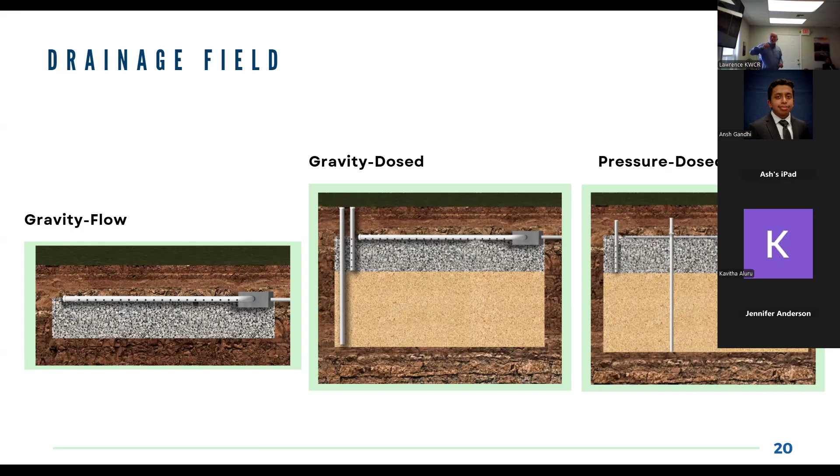Now they have to test, and they have to have at least a 4-foot separation between the bottom of the drainage gravel where the water is trickling down before it enters the water table. That's called the zone of treatment before it enters the zone of disposal. Many older basic systems were gravity flow, where the water from the tank just flows out by gravity. Often we'll have a pump involved where it could be gravity dosed, and sometimes pressure dosed, where a pump is pushing the water out. It's almost an underground sprinkler system that's spraying down into the gravel.

When we have a pump involved and it's a sprinkler type system, a pressure dose system, the drain field can be reduced by 1/3 because it's that much more efficient. Instead of this big area, we're reducing it by 1/3. And if you look at how costly it is, reducing it by 1/3 is saving money. So often people will go with pressure dose systems.

Is that a special sand? No, it's really not. It has to be a certain size, but it's your basic playground sand, the same stuff you have in the kids' sandbox. The sand that was used in the 80s and 90s was approved by the state at that point, but the sand used today is different than that sand. So there's two different types of sand. I wouldn't say so. It's still approved because sand can be very messed up and have all kinds of contaminants. It has to be clean, certainly. Different type of sand. Confirm that with me, please.

I'm just curious when you say different type of sand, because the state approves the quarries that we get it from, but it's the same basic sand that we use for concrete work or for child playgrounds. If you confirm that for me, I appreciate it. I don't know what exactly you're asking me to confirm? Two different types of sand have a different, maybe, long-term absorption rate. Well, that's exactly true. Some are acceptable and some are not. They give us a standard range, and the sand always has to be tested, an engineer tested to show that the sand we're using fits that range as approved by the state.

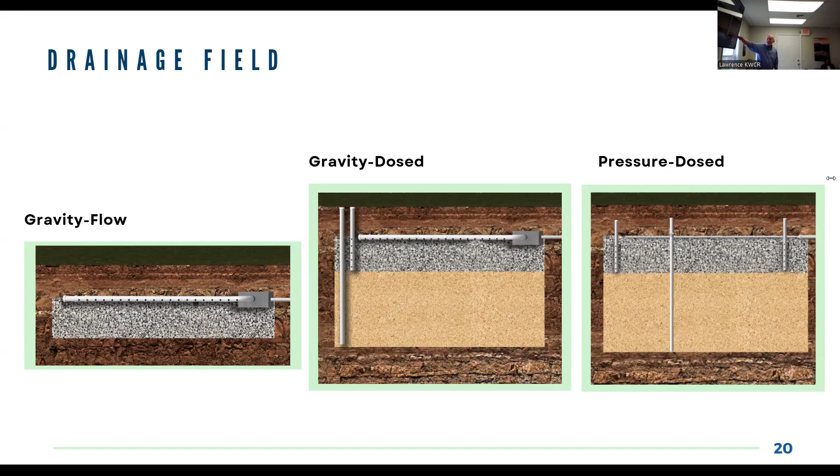So when we're going into these systems and dealing with the drain fields, these days your modern drain field will in fact have a 4-foot layer of sand as the zone of treatment. And then below that is referred to as the zone of disposal, where that clarified wastewater is now entering the water table below. And if we go to the next slide, please. Oh, this is just a picture.

When we're talking about drainage components, some properties, if the water table is deep enough, we can have a seepage pit. Seepage pits, when we test, we have to show that the water table is 8 feet below the proposed bottom of a seepage pit. Seepage pits are 6 feet deep, buried in the ground, and then 8 feet below that will be the water table. So we're talking about a water table 14 feet or more deep. And we'll find that along the Delaware River, some places up around Bergen County.

If the property is smaller, you don't have maybe the room for a very large drain field, but the water table is deep enough, that allows seepage pits. And depending on number of bedrooms, you would have 1, 2, 3, even 4 seepage pits as your drainage area instead of a big drain field. Now, it's similar to a cesspool. I was just thinking that. Except that all of the sewage materials are removed in the tank and only clean water is going into this pit as the drainage component. You're not dumping sewage into this. That's the big difference as far as an upgrade.

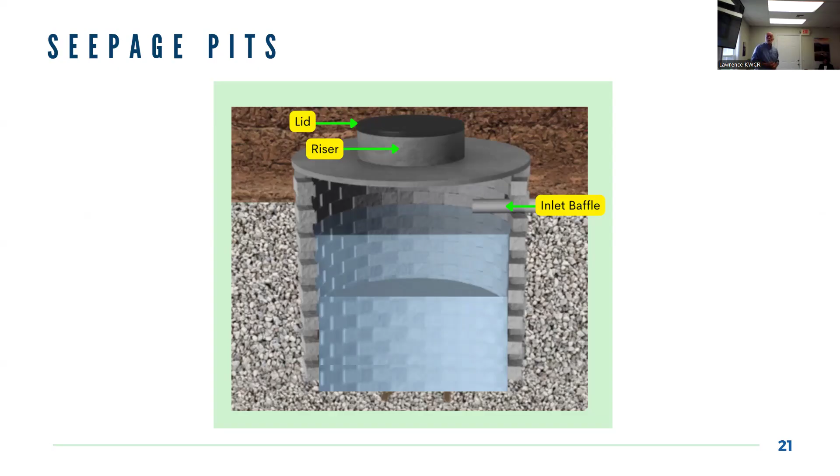So we do run into seepage pits occasionally, certain properties with the water table very deep. You can't put that where it's sitting in the water table because that can cause contamination. You still want to have some filtration in the soil before the wastewater enters the water table. Next slide, please.

Okay, so we're going to talk about changes in the septic code, and I'm going to pull that up again before I start some recording.

I'm sorry. Oh, thank you. That's very kind of you.

So, the old code, which basically was part of the public health code. I'm trying to move your way to it. Anyway, back as far as 1967, the previous wastewater treatment regs were around, and those of us that were working with septic matters before the 1990 newer code, we would often have to refer to sometimes health regulations.

It was interesting. At any rate, as of 1990, and then again revised in 2012, big changes in the septic code where the volume of wastewater per person per day were recalculated. Septic tank material sizes and shapes were changed in terms of what was acceptable and used. Advanced treatment technologies were allowed. Then it was required to have a zone of treatment to protect the groundwater and then a proper zone of disposal. And so next slide, we're going to click into some details here.

When we talk about the volume of wastewater per day, since 1990 it's been calculated when we're determining sizing for septic systems. Residential wastewater use is set at 200 gallons per day for the first bedroom. In the old days, I did home inspections for 30 some years, and we used to refer to it as a master bedroom. That's not a proper term these days for a number of reasons. So now it's the primary bedroom, first bedroom, whatever. But it's possible that husband, wife, and or partners of some type would be sharing a bedroom, two people in a room. Therefore, 200 gallons per day is allowed for that first bedroom.

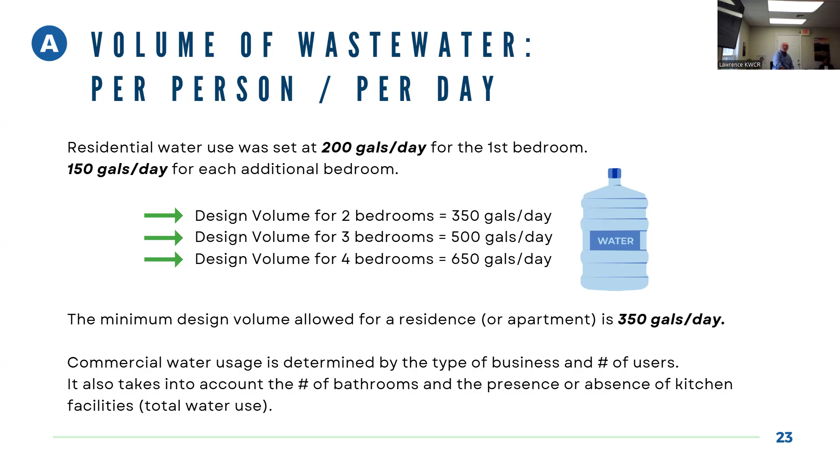Now, commercial water use is very different depending on the type of business, number of users. Some commercial properties have bathrooms, some have kitchens, some don't. And the number of users, all of that is taken into account. So commercial water use is different with every kind of business, how large, how many people, all of that makes a difference. Very different than residential. Residential is a very basic calculation. And then when we calculate the gallons per day, we have other standards that determine how big the drain field has to be. And that's a separate issue. So next slide, please. Excuse me?

It's like 2 tons of water. Oh, it's a lot of water. It's really, yes, it's amazing. But again, these calculations, it's all about over design to be sure that we're not easily hurting the system.

It's interesting. For the longest time, when I was inspecting septic systems, older septic systems seemed like forever had steel tanks in the ground. Guess what? It finally became clear to everyone that steel corrodes in the ground. Steel doesn't like moisture, and you get rust and decay, and they would crumble, rot, and collapse. So at one time it was thought steel tanks would last forever. No, steel tanks are not allowed anymore because they did collapse. They did corrode.

And nowadays, tanks are made of poured in-place concrete or precast concrete, fiberglass or poly. As a company, we don't like to work with the fiberglass or poly. When you have that tremendous pressure under the ground, the weight and all that, we don't find that they withstand that well. They're certified as such, and you have to be careful not putting it too deep and all, but we very much prefer working with the concrete. We will almost always use the concrete rather than the poly or the fiberglass.

In fact, the fiberglass, it's been shown, if that's exposed to sunlight, the fiberglass begins to break down in the sunlight. It's not cool, but I mean, most of the time it's all completely buried, so that's not much of a concern, but it just doesn't hold up the way the concrete does.

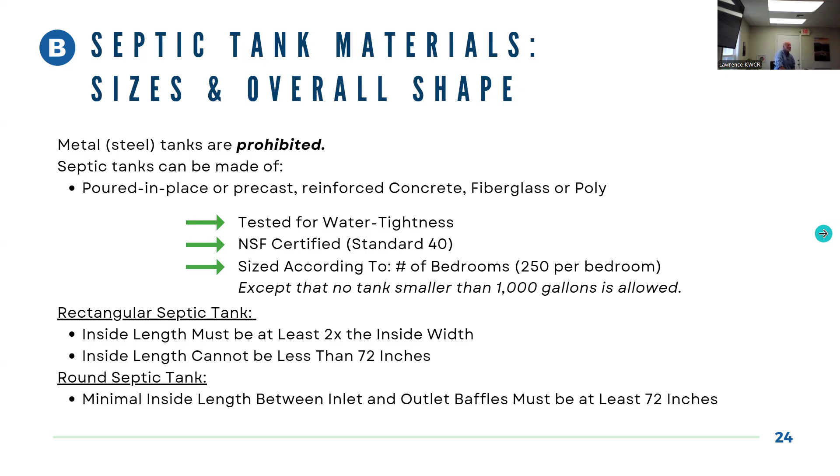Okay, next slide, please. So when someone adds on to their home, this is a huge consideration. You're adding a bedroom? Well, yeah, if somebody's adding on to a home, then this is also something they have to consider into the price of an addition. Yes, and you're not just adding to the size of the tank, but the drain field also has to be upsized because more wastewater is being introduced. And that's certainly something, if it's a bedroom you're adding, not just a family room. Yeah. Well, that's true. That makes all the difference. When you're doing an addition, it depends.

Are we doing something that's going to change the number of residents? If it's simply more recreational space to enjoy our home, will there be extra? No additional occupants, then the septic doesn't have to be changed necessarily. That's all part of the design. Absolutely. So that was a good point.

Thank you. In 1990, with our newer septic code, the government allowed for experimental systems to be put into systems for testing purposes. And as of April 2nd, 2012, that was the latest update of the septic code. Those experimental systems were all allowed and approved. And now many systems have those experimental type components that allow drain fields to be smaller because systems are much more efficient now than they used to be. So instead of experimental, they're established technologies, and the older technologies are phased out.

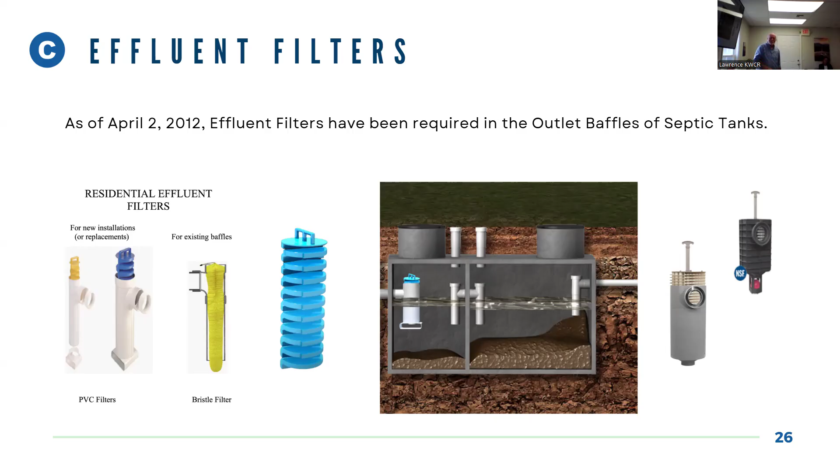Then under that is a layer of the zone of disposal where the wastewater, after it's been filtered, goes through the drainage gravel, all of which is covered with bacteria that's capturing pathogens and germs. Then it goes through the 4 foot of sand. Then it goes into the layer below, the zone of disposal, where it basically goes down and joins the water table. And if the water table is higher, all of this has to be raised up because these zones are required. And that gets interesting. That's how we get into our mounded systems, which are coming up. Next slide, please.

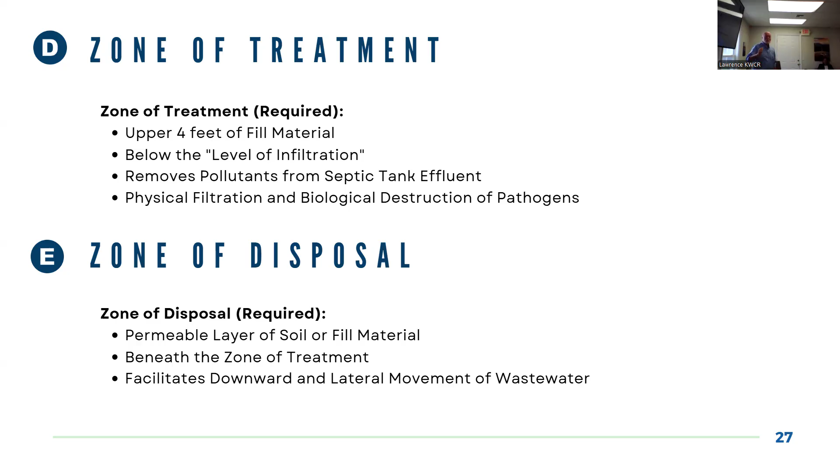So that's what we're talking about. We have the zone of treatment. Then we have a zone of disposal, and that's when the water table is here. And as required, if the water table is higher, all of this is still required, and therefore that's raised up. That's why we have these bumps in the ground, these raised mounds, because we still need that 4 foot layer of treatment, 4 foot layer of disposal before we have the water table. That's what that's about. And that's all since the new code. Oh, that makes so much sense now.

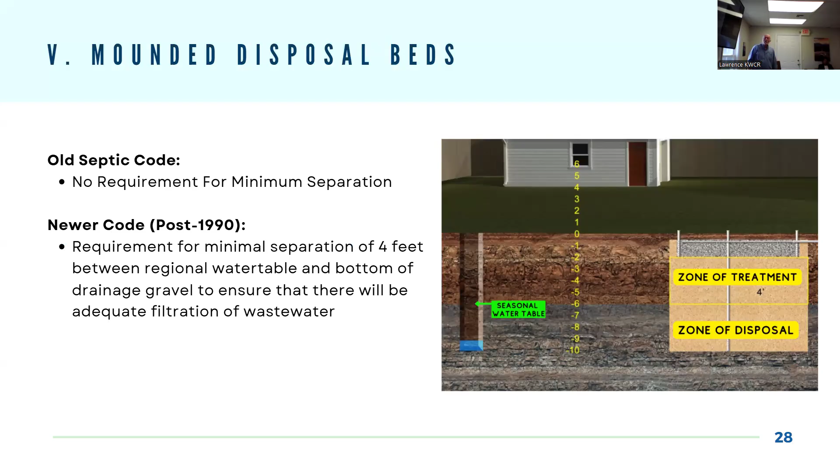Now, if we go to the next slide, you'll see we have a representation. And here we go. So the seasonal water table is coming up. It's 12 inches, so it's down here.

As it gets closer to the ground surface, seasonal water tables here. Therefore, we end up with this little bit of a mound because, again, this has to be right there. The zone of treatment is at the top of the water table. The zone of disposal can join the water table because that's clarified water. The zone of treatment is our 4 foot above.

So if the water table is closer to the surface, guess what? This is going to be higher. And as that becomes higher, it also becomes bigger to support that. You can't have deep walls. You have to build it. So when you go to a property and you're looking, you go, you've got a high water table. That's what that's about. Yes, there. Big problem area.

Absolutely. So 4 bedroom sizing. That makes so much sense. 50 by 23 would be the size of the drain field. That's pretty big. But with the actual slope size, 64 by 37, because again, your drain field is 50 by 23, but the slope size, because you can't have it too steep, it gets that much bigger, all depending on where your water table is in the ground. That's what that's about.

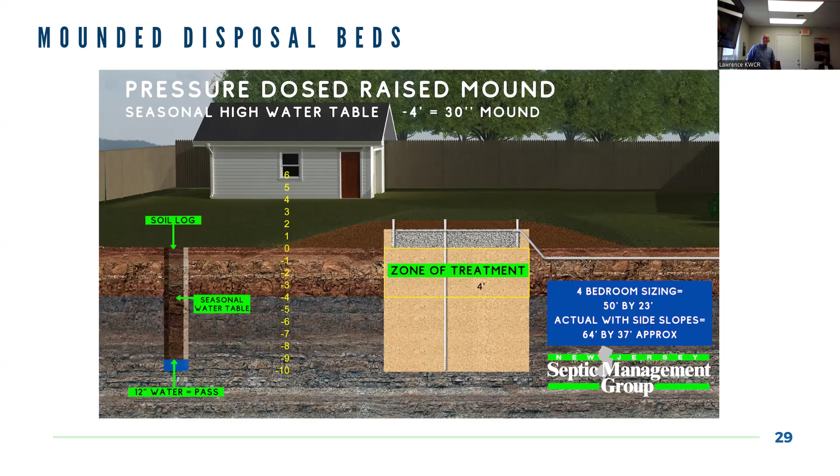Okay, next slide. I think we talked a little bit more about this. Yeah, I'm like still looking at this. Oh, okay. Well, we have more about this.

So when we do soil logs to test the ground to see where the water table is, we're looking to see indications of what the seasonal high water table is. That's different possibly depending on time of year. Oh, right now we're seeing water sitting here. Yes, but the engineer is looking at the staining in the soil caused by when the water table was at its highest, often during the spring. There's an oxidation reduction in the soil where it changes the color.

So engineers, when they look into the soil, can see where the high water table was, even though the water table is not there when they're testing. Water's here, but we can see from the staining that in the spring it was up to here. They have to design according to that higher level so that it's not contaminated in the spring when it comes up there. So okay, water table's here. Yeah, but the seasonal high water table is here, therefore 4 feet above that. Now we're up here, and that's what we're looking at.

And again, as your top gets bigger, the sides get bigger because we have to have a decent slope. You can't be a steep drop off. We have to be able to come up and down a certain percentage incline. You've got to be able to get up with your mower, and many people like to use that slope area, they'll put a badminton court up there or lawn chairs and sit up there. You don't want to do gardening or something that'll disturb the septic, but you can make use of that area. It's not radioactive. You just have to watch what you're doing.

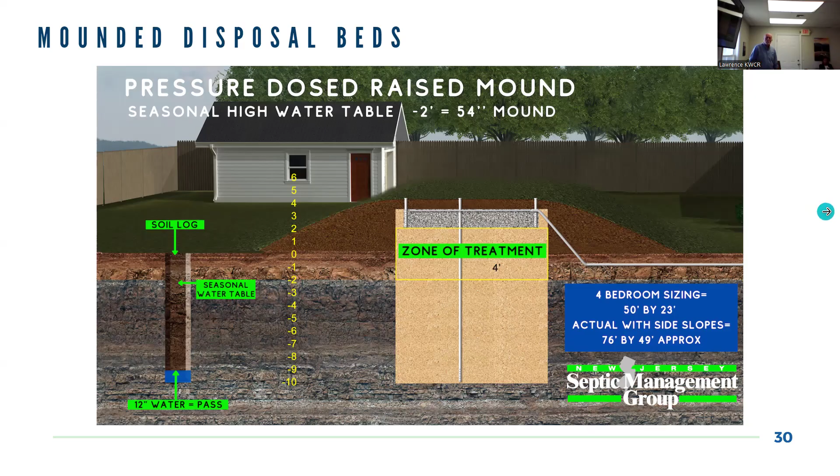So we can do an ATU with a pressure dosed system. And with that, we have the same high water table that we had there, but with the pressure dose system, we can reduce that separation. Instead of that 4 foot separation, we can reduce it to 12, sometimes 18 inches, worst case. From 4 foot to 18 inches, we're taking 3 feet off the top. And by reducing that by 3 feet, we're bringing in the sides too. So we're making a huge difference just by using advanced technology.

The ATU is just an advanced treatment tank. That's all we're doing. We're digesting the sewage better, which makes the wastewater cleaner, and therefore the drain field can be reduced. It's remarkable, the use of modern technology. So if the water table would tell them, oh, you've got to have a raised mound, and people don't want a raised mound, well, we put in advanced technology. We don't have to have much of a raised mound. Sometimes it removes it completely. Makes a world of difference.

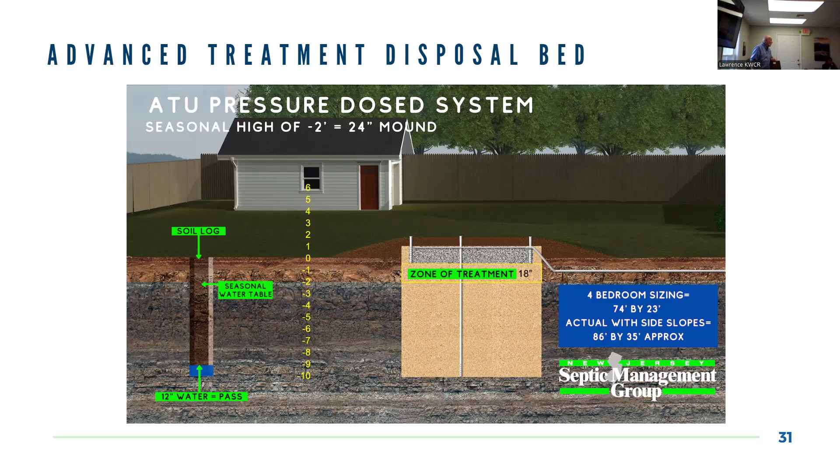It used to be, oh my God, I've got a mound, what are we gonna do? And now there's ways to deal with that. At the design level it's perfect, but we have replaced many big mounds by putting in advanced technology. We've eliminated those mounds, and we have photo after photo of properties before and after. What a remarkable change, because sometimes that mound is in the front yard. You can't even see the windows of the house. So you get rid of that, and it's like, wow, look at this. We've opened the property up.

It's remarkable. What's the price difference, would you say, between the two? The advanced technology is possibly 25% to a third more than the standard. So, again, when we're talking about septic systems maybe being 50 or 60,000, an advanced treatment system, if you said another 10 or 12,000 possibly, but the difference of what you can get out of that. Right, makes a big huge difference for the right property, absolutely. All right, very good.

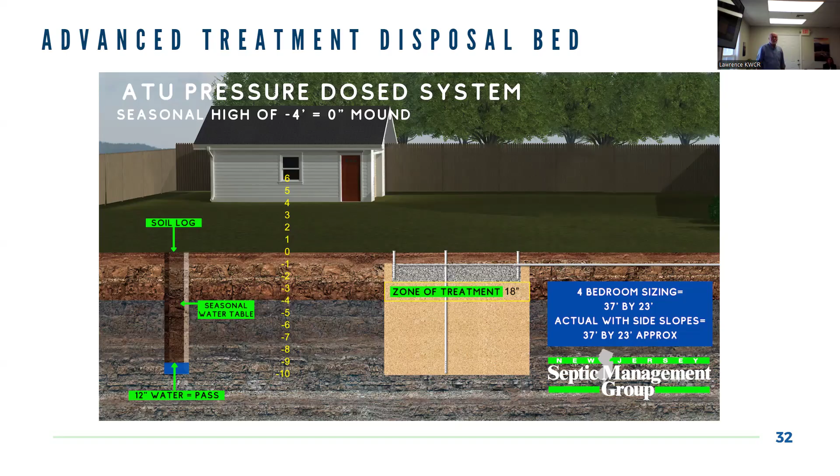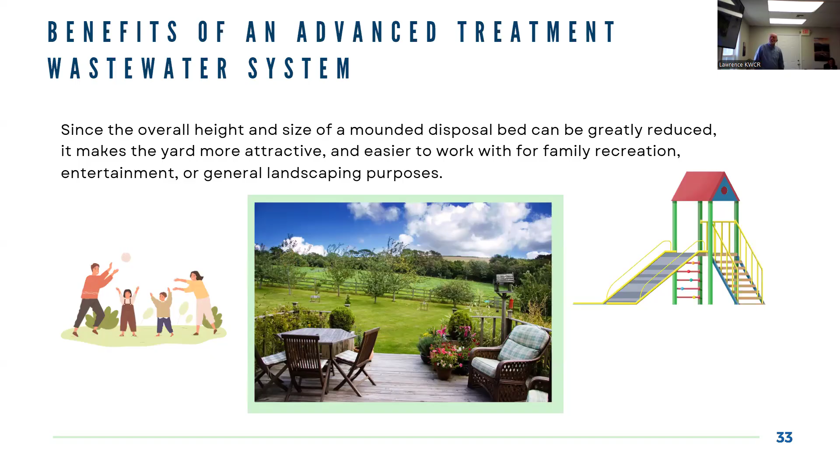Next slide, see what we got here. So when we can do that, obviously, we're making the yard more usable for recreation purposes, and it makes a world of difference. And these days, more and more systems are working with the advanced technology. Makes all the difference in the world. And that's, I think, where we're gonna leave it today, because we jump into quiz and whatnot after that, and I don't think we want to deal with that today.

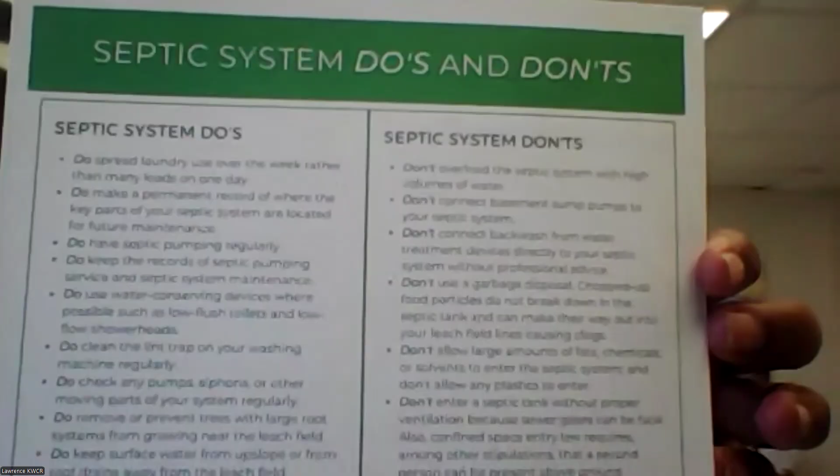There we go. Our septic do's and don'ts have a lot to do with day-to-day items such as what kind of laundry detergent to use, and what not to put in the septic system. Do spread the laundry out through the week. Do use water conserving devices. Clean the lint trap periodically, and then acceptable products, the kind of detergents, the kind of toilet paper. Sorry, guys, I'm trying to find it. Every time, we always get this to the customer to help the septic system last longer. It really helps a lot for those people that are not familiar with septic systems.

At all times, we are available for any calls or questions relating to that septic system. Certainly, if we did the inspection, we're happy to answer any and all questions related to that. This is a big thing to have, guys. I agree with having this with you when you're dealing with clients that have septic and you go to their house; you have this whole checklist of good insight you can give them. There's a lot of information. We have a lot of materials that you can use so your clients are not so concerned.

Those that are not familiar with septic systems, all of this will help them be less concerned and realize that living with a septic system doesn't have to be a big problem. Right, like working with buyers, this would be good for them, people that aren't familiar with septic. Absolutely. Makes all the difference in the world. Okay. Thank you for your time.

Any particular questions going forward? Do you guys have any questions online? Comments, concerns? Hello, Lawrence. Good morning, everyone. I just posted a question.

What maintenance do we need for the septic tanks apart from pumping them every 2-3 years? Actually, the filter in a tank should be cleaned twice a year. And as you said, the septic tank has to be pumped periodically. That really is all that's required of maintenance in septic tanks. Thank you. There's not that much to that.